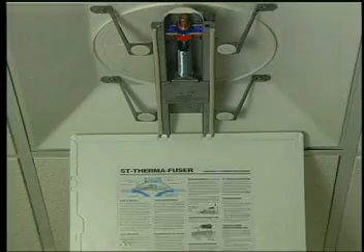The round damper moves down to open and up to close, metering the flow of warm or cool air entering the room. The damper is mechanically positioned by a thermal element, which is both a room thermostat and an actuator.

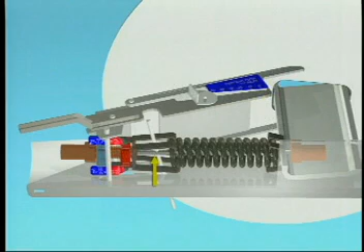The room thermostat is a large brass cylinder containing a petroleum-based wax. The wax melts and expands when heated, pushing against a fixed piston which moves the thermostat outward. A heavy spring pulls the thermostat inward when the wax cools and contracts.

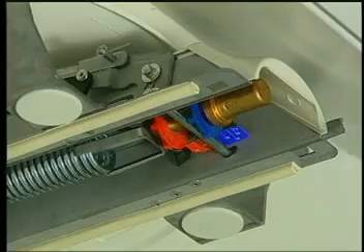Thumb wheels on the room thermostat push the two offset axles of the control arm to move the damper up or down. In the cooling mode, the damper opens on a rise in room temperature.

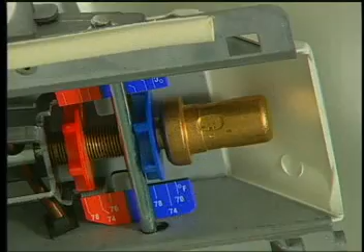As the room warms, the wax in the room thermostat melts and expands. This pushes the thermostat and cooling thumb wheel outward. The control arm pivots down, opening the damper and allowing cool supply air to enter the room.

When the room cools, the wax contracts and the spring pulls the room thermostat inward. This pivots the control arm up, closing the damper. In practice, the airflow reaches a point to satisfy the room load, and the damper simply hovers around that point.

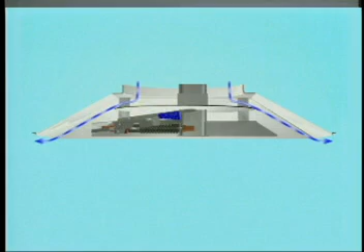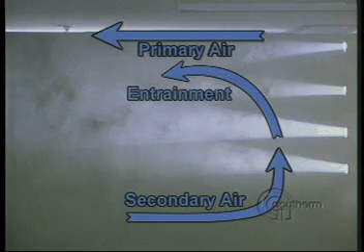As with all diffusers, air circulates around the room in a circular motion. Secondary air rises in the center of the room, passes over the appearance panel, and entrains with the primary air at the outside edge of the diffuser.

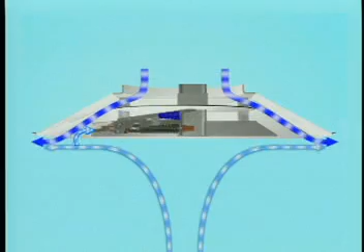This secondary air best represents average room temperature. To monitor room temperature, a continuous sample of secondary air is drawn around the appearance panel, past the room thermostat, and through the channel. This is accomplished by feeding primary air through a nozzle in the side of the venturi tube.

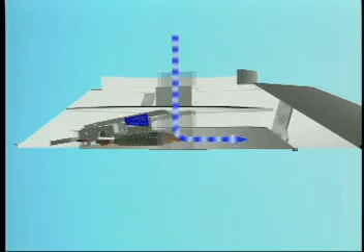The primary air blowing through the nozzle creates just enough vacuum to draw some secondary air around the appearance panel, over the thermostat, and out the other side.

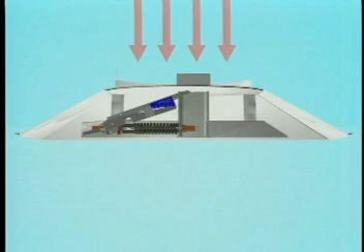Changeover between cooling and heating modes is determined by supply air temperature. A second large thermostat actuator, located at the bottom of the venturi tube, senses supply air temperature.

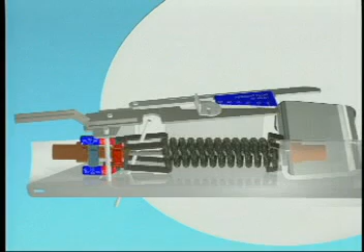Warming the changeover thermostat changes the STHC to the heating mode by indexing the room thermostat outward. As a result, both thumb wheels are indexed outward, so that the heating thumb wheel now controls damper movement.

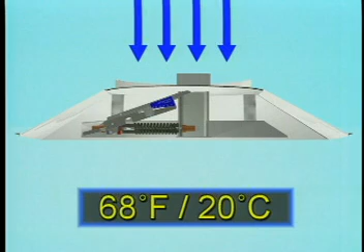Changeover from cooling to heating begins at supply air temperature 76 degrees Fahrenheit, 24.5 degrees centigrade, and completes at 80 degrees Fahrenheit, 26.5 degrees centigrade. Changeover back to cooling begins at 72 degrees Fahrenheit, 22 degrees centigrade, and completes at 68 degrees Fahrenheit, 20 degrees centigrade.

In the heating mode, the damper opens on a drop in room temperature. As the room cools, the wax in the room thermostat contracts, the control arm pivots down, opening the damper and allowing warm supply air to enter the room.

When the room warms, the wax expands and the control arm pivots up, closing the damper.

Heating and cooling set points are separately adjusted by turning the heating and cooling thumb wheels. Align the outside of each thumb wheel with its respective temperature scale. Each set point can be individually adjusted between 70 and 78 degrees Fahrenheit, 21 and 26 degrees centigrade. Both are factory set at 74 degrees Fahrenheit, 23 degrees centigrade.

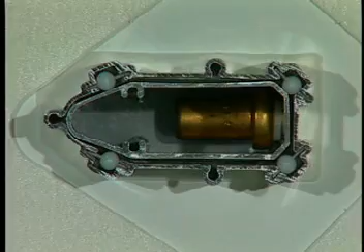The damper moves smoothly with very little friction because of the ball bearings embedded in the hub. In addition to separate VAV heating and VAV cooling set points, the STHC has a dial-in minimum flow stop.

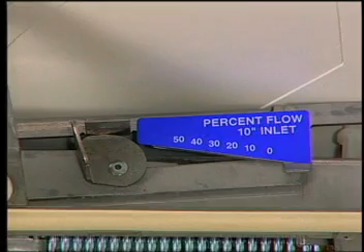Simply turn the dial on the side of the control arm to the desired point on the percent flow scale. Another feature of this diffuser is that the damper can be opened for balancing without opening the appearance panel by using a balancing lever next to the induction air inlet.

Push this lever to the right and then up to open the damper. To close, push the lever down until it catches on the small latch. Therma-Fuser STHC, the ultimate VAV diffuser.